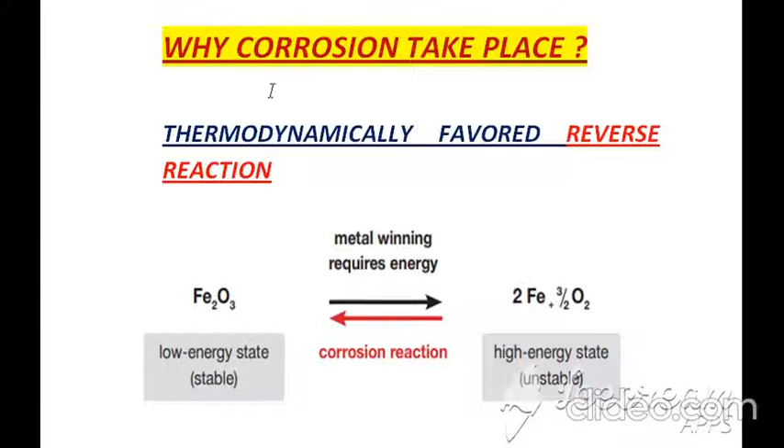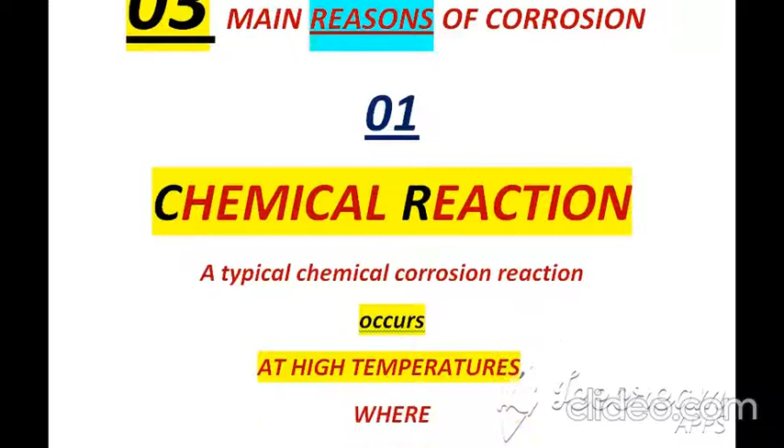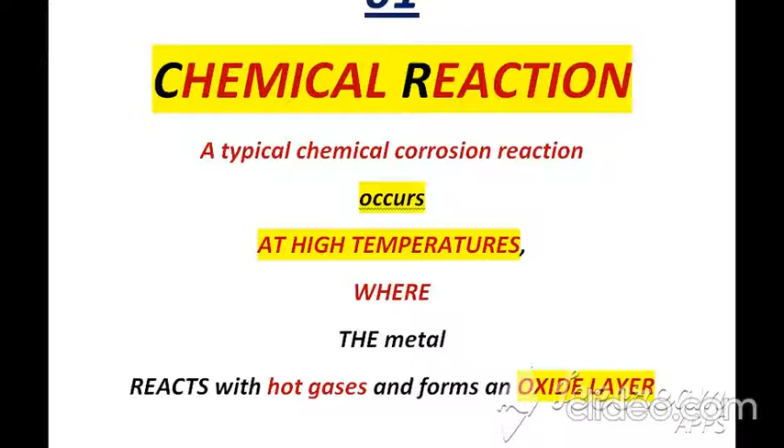If we explore the reasons for corrosion, we find three reasons, and the first one is chemical reaction. A typical chemical corrosion reaction occurs at high temperature, where the metal reacts with hot gases and forms an oxide layer, and that oxide layer causes corrosion.

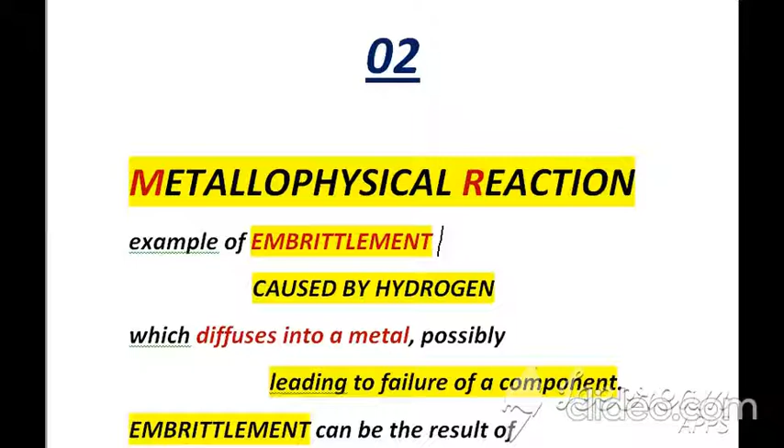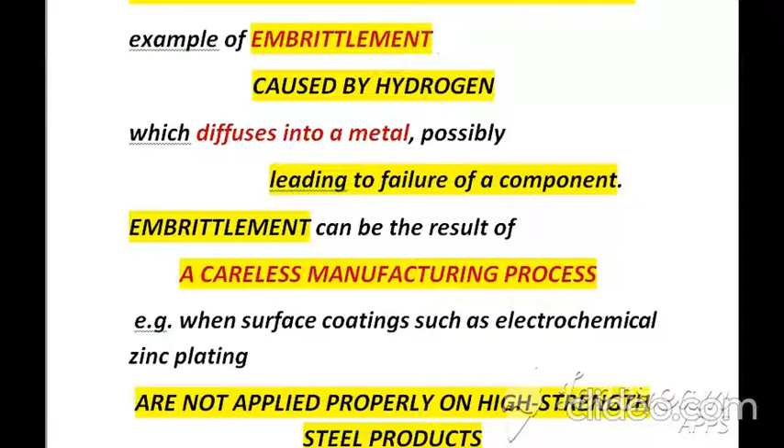The second cause of corrosion is metallophysical reaction, which we will understand with the help of an example: embrittlement caused by hydrogen, where hydrogen gas diffuses into a metal, leading to failure of a component. Embrittlement can be the result of a careless manufacturing process, for example when surface coatings such as electrochemical zinc plating are not applied properly on high strength steel products; this can also initiate the corrosion process.

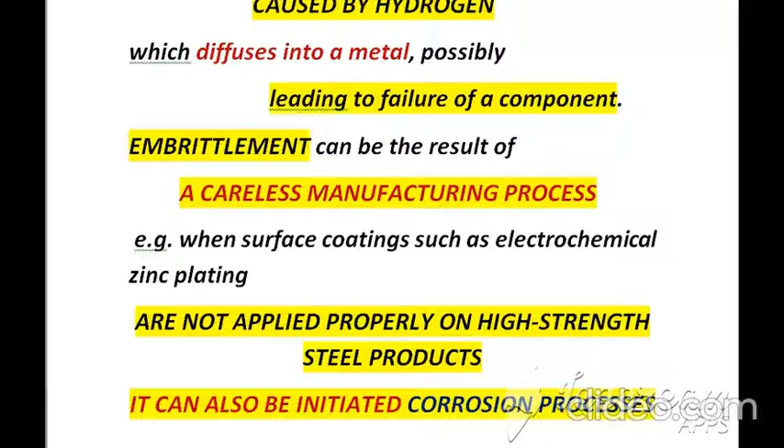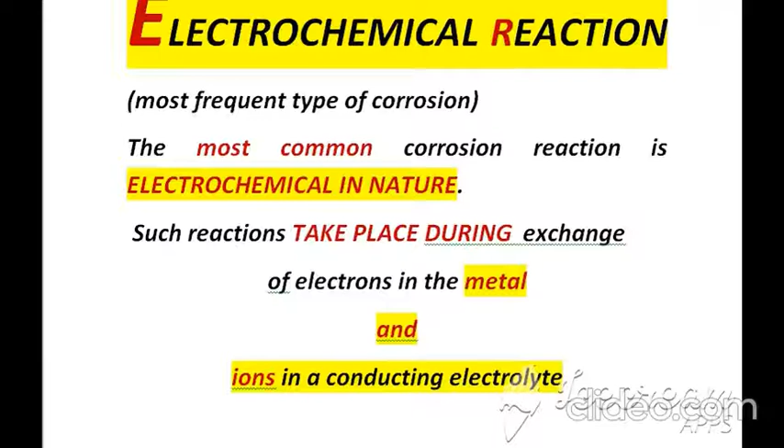The third reason of corrosion is electrochemical reaction, and that is the most frequent type of corrosion. The most common corrosion reaction is electrochemical in nature. Such reactions take place during exchange of electrons in the metal and ions in a conducting electrolyte.

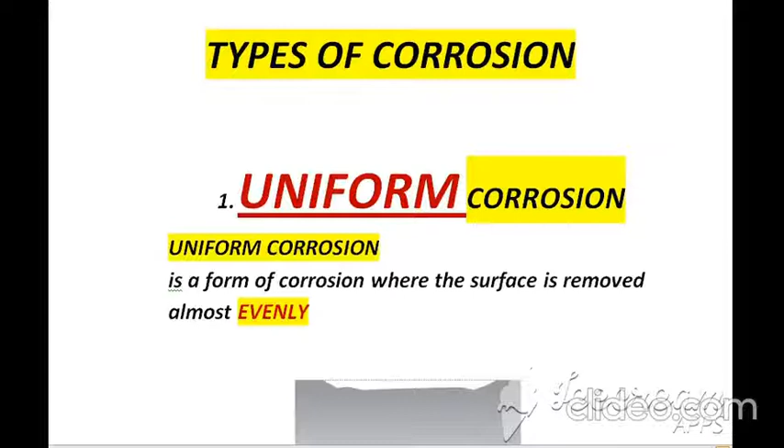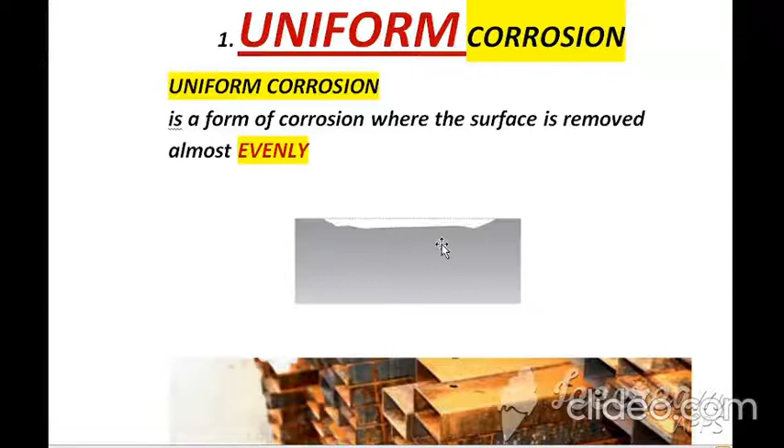Among the types of corrosion, the first one is uniform corrosion, a form of corrosion where the surface is removed almost evenly. If you concentrate on this diagram, the surface is even, it's not uneven. You can also see the second diagram to complete your concept.

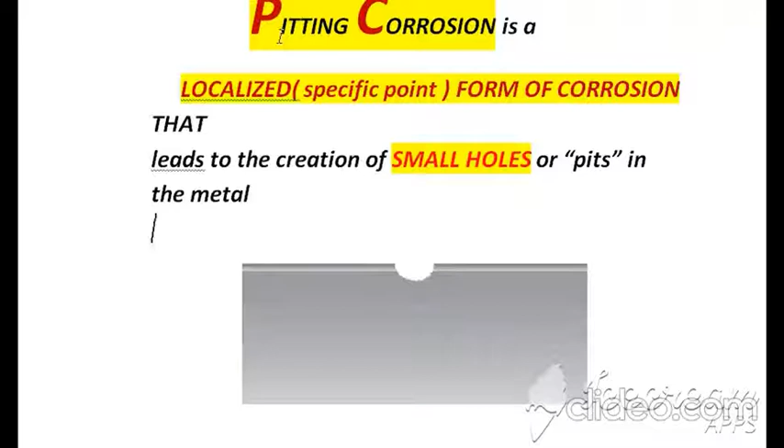Pitting corrosion is the second type of corrosion. Pitting corrosion is a localized form of corrosion, and localized means a specific point. It means that corrosion starts at a point, not on the whole surface. After this corrosion, we find small holes or pits in the surface of the metal. In the center of this block in the diagram you can observe a hole; as a result of pitting corrosion we find these types of holes or pits.

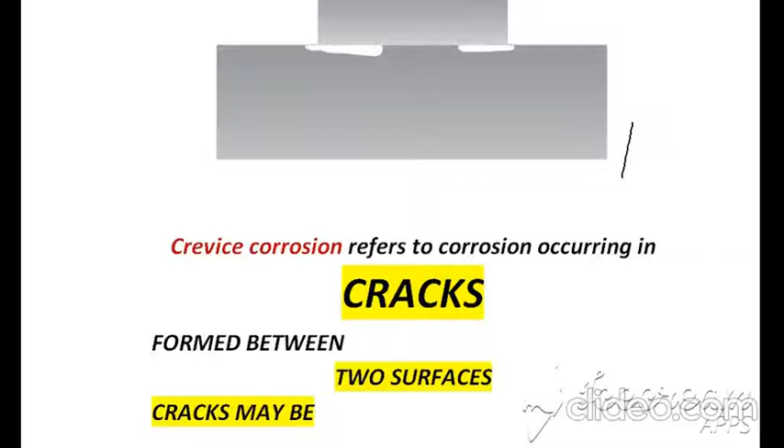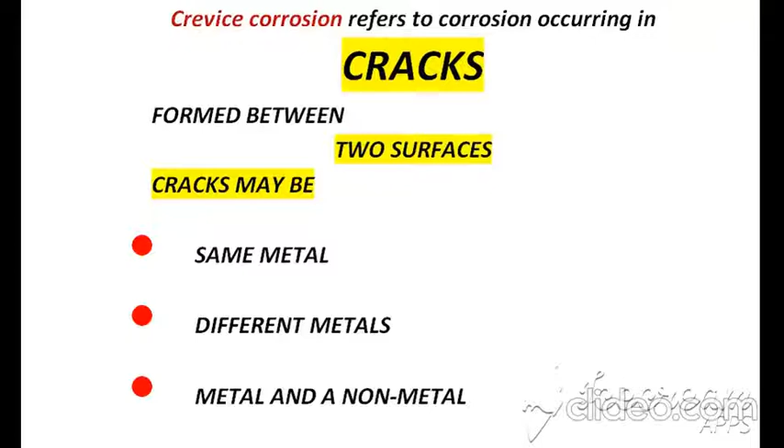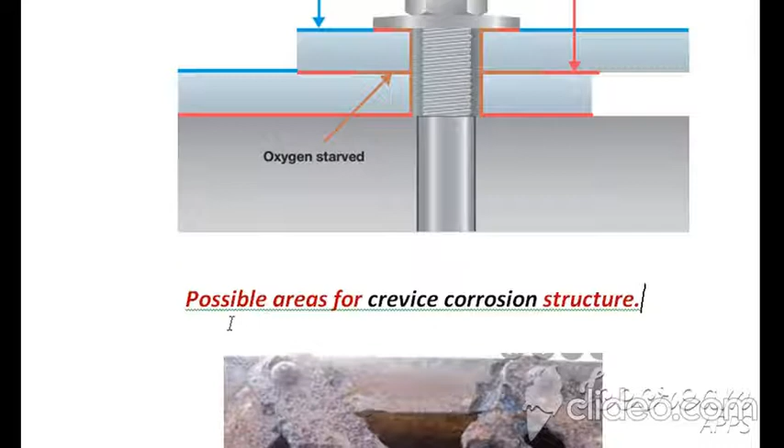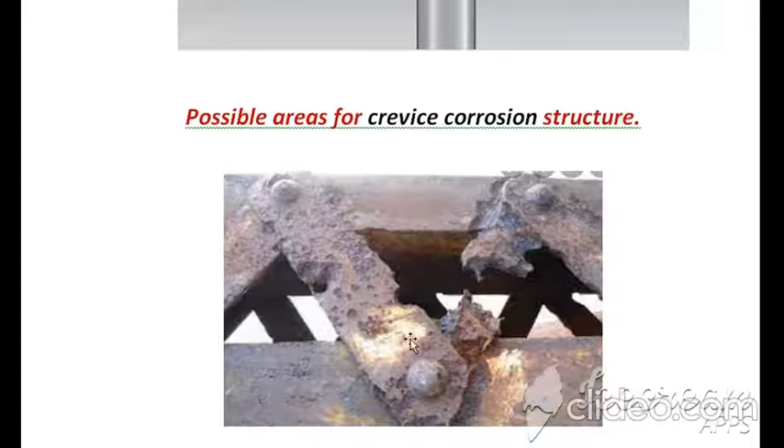Crevice corrosion is the third type of corrosion. Crevice corrosion refers to corrosion occurring in cracks between two surfaces, which may be between the same metals, different metals, or metals and non-metals. In this diagram, the arrows show possible areas of crevice corrosion in the structure, and the diagram shows the result of this type of corrosion.

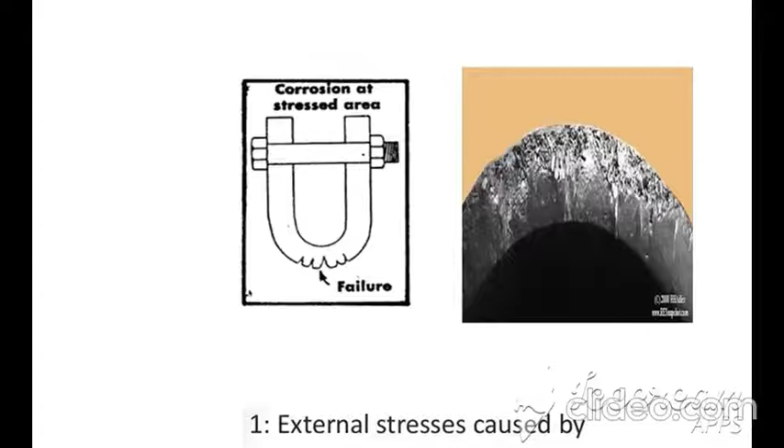Stress corrosion cracking is the fourth type of corrosion, and it is a combination of both mechanical and electrochemical corrosion. If you observe these diagrams, curved areas are under stress, and as a result of that stress, cracks are created. These cracks are created by mechanical action, and after that electrochemical reactions start and create corrosion.

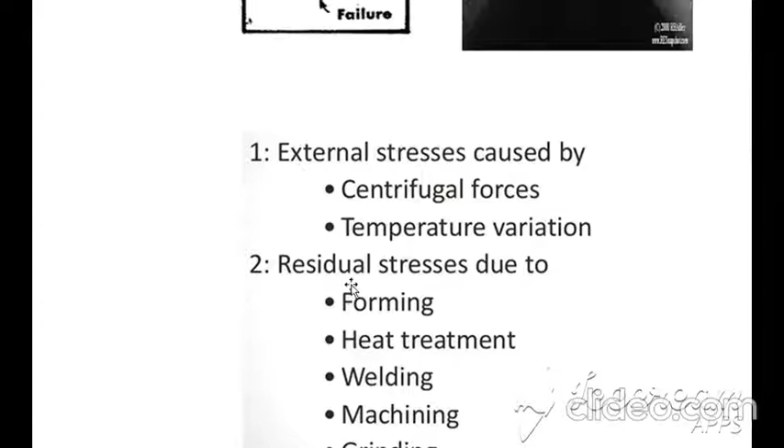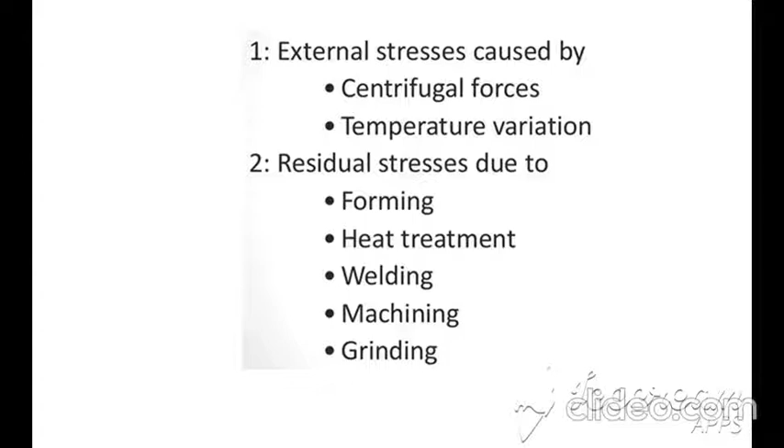These stresses have causes: external stress may be caused by centrifugal force and temperature variations, and residual stresses are due to forming, heat treatment, welding, machining and grinding. Any type of stress may produce cracks, and when these cracks undergo electrochemical reaction, we find corrosion, which is called stress corrosion cracking, abbreviated SCC.

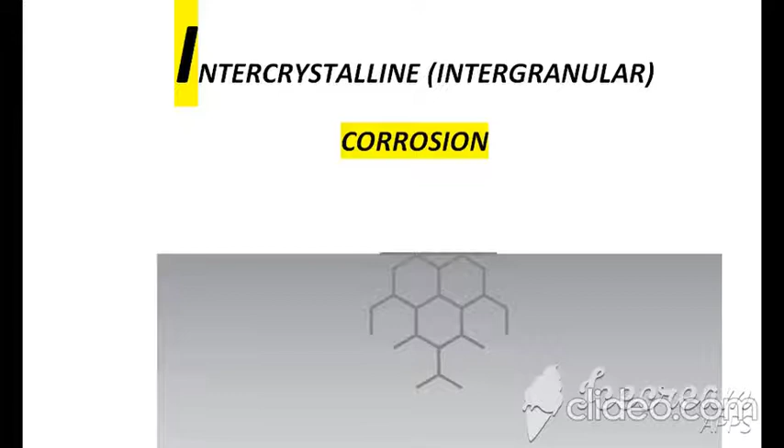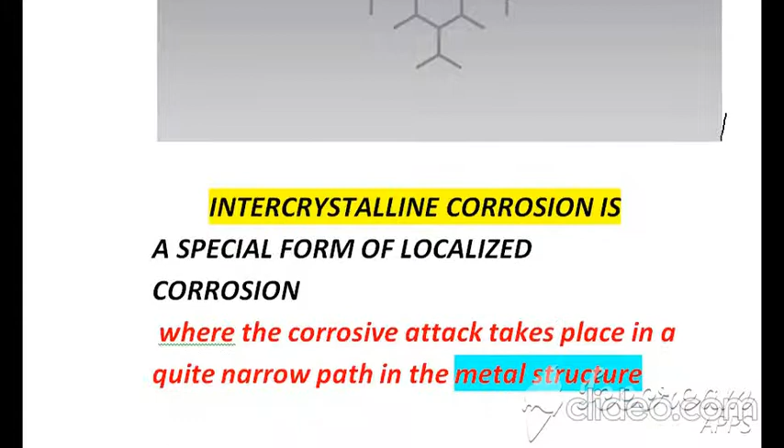Next is intercrystalline or intergranular corrosion. Intercrystalline corrosion is a special form of localized corrosion where the corrosive attack takes place in a quite narrow path in the metal structure, and you can observe the path of the corrosion attack in this diagram.